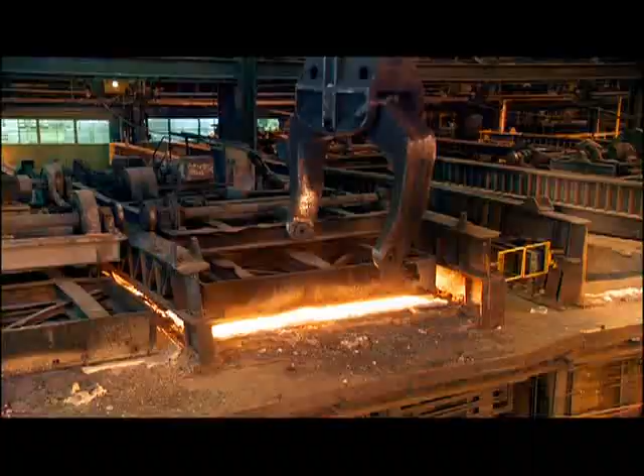It truly is a miracle metal. Steel, the most versatile, flexible, toughest stuff out there. And it's everywhere. In our buildings, our weapons, our roads, cars, and art. Even in our bodies. 90% of all metal made on this planet is steel.

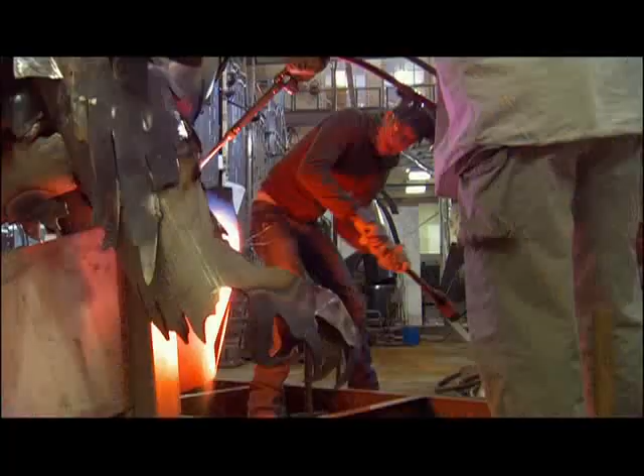Want to impress friends with your razor-sharp wit? You don't need a PhD, because I already got one. Sink into the steel springs of your chair, because I'm about to rivet you to your seat and make you a steel genius. Hi, I'm Daniel Wilson, and I want to know everything. With a PhD in robotics, I tend to see the world a little differently. So I'm going everywhere, finding the hidden side of everyday things, revealing it all in The Works.

Man's quest for the perfect shave has lasted 30,000 years. Flint, copper, iron, and bronze. Then, in the mid-1800s, the ultimate beard buster slices them all to ribbons. It's a razor made of steel. That's a sharp-looking blade. Steel. It originated in East Africa. It's the core of advanced human civilization. You know, steel's really only iron, with just the right amount of carbon. It's like alchemy, really.

The magic elements, iron and carbon. They strike a perfect balance between strength and flexibility. The story of steel is a mind-blowing journey through space and time. A trial by fire to the extremes of 3,000 degrees Fahrenheit. For more than a century, steel's been lifting us skyward. From the first 138-foot skyscraper built in 1885 to this 1,700-foot monster. But it's not just buildings. We live in a world of steel.

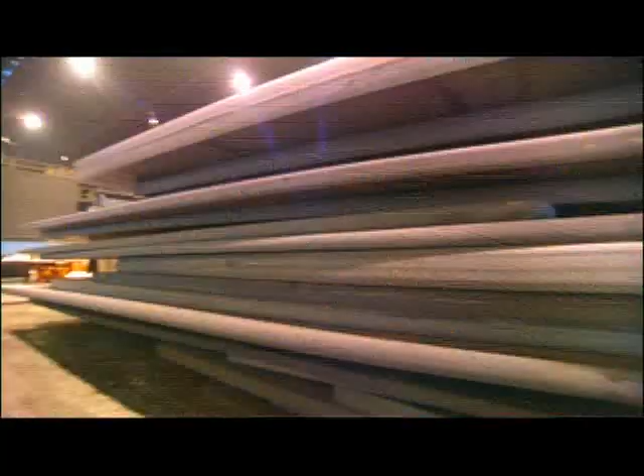Mankind produces 1.3 billion tons of it a year. That's 500 pounds for every person on the planet. Together, China, Japan, the United States, and Russia make 50% of the world's supply. Asia uses the most steel, whereas Africa uses the least. Pretty surprising, since Africa was where steel was first discovered. 3,000 years ago, they had the monopoly at a time when steel was more precious than gold. It gave its owner an edge, literally. Archaeologists tell us that the first steel tools were weapons, honed to a killing point. And even today, steel is still the material of choice for master forgers.

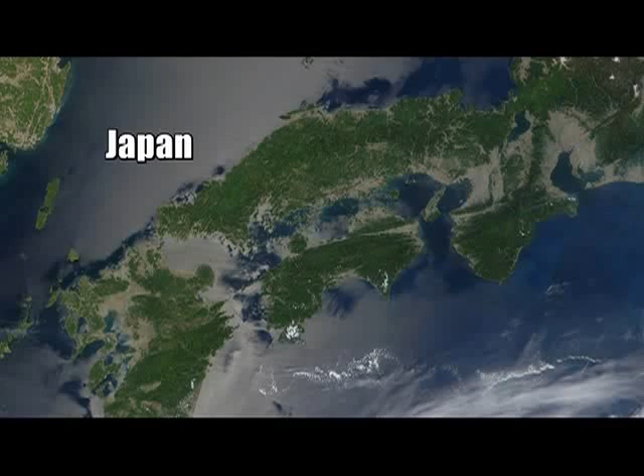I'm still thinking blades, and there's nothing sharper than a samurai sword. The secret to steel's miraculous combination of iron and carbon was perfected in 10th century Japan by samurai sword makers. But now it's nearly a lost art. I'm calling on one of a few masters left, hoping he will reveal the secret. We're on our way to meet the most unlikely samurai sword maker you can imagine.

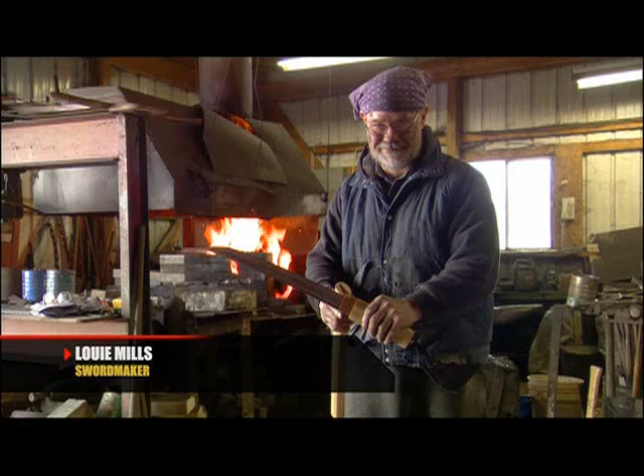Pleased to meet you. Come on, let me show you my shop here. Okay. Louie Mills has been making swords for over 30 years. His handcrafted weapons sell for thousands of dollars a piece. The process of making a samurai sword takes months of painstaking, back-breaking work. Today, though, Louie is going to let me try my hand at some basic sword making.

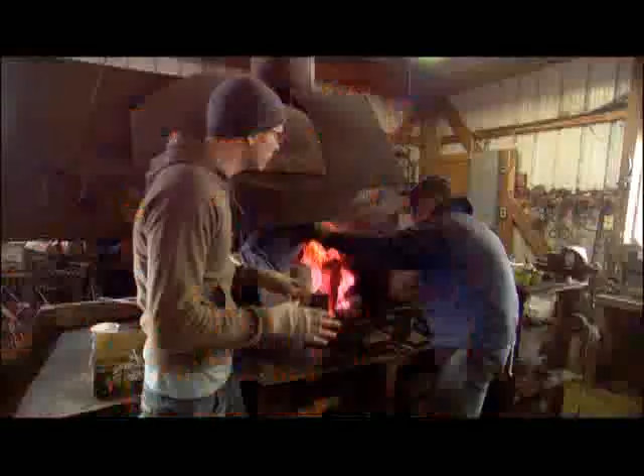So this is the first thing you do when you make a samurai sword? I have to make the steel. Got to make the steel. So what do we just pour in there? We poured in pure iron. It's 99.9% pure iron. But it looks exactly and feels exactly like kitty litter. I don't think the cats would enjoy it. Time for Steel Making 101.

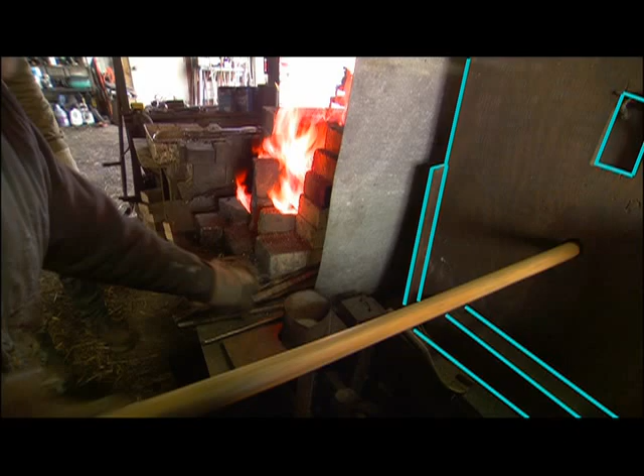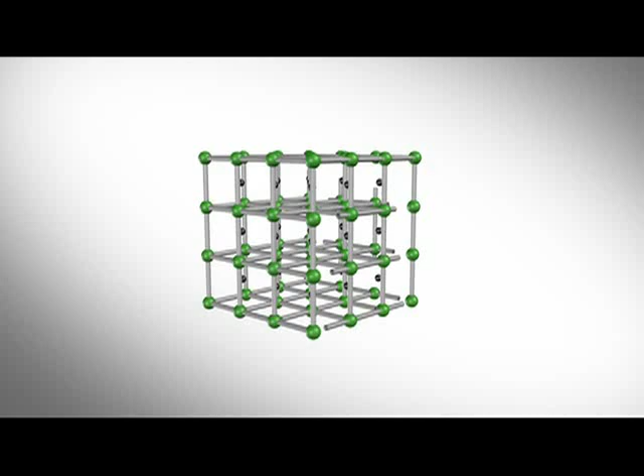The big breakthrough that led to steel was the discovery that blowing air into an open hearth, charcoal-fired furnace can generate heat sufficient to melt iron ore. Above 2,700 degrees Fahrenheit, the bonds between iron molecules break, allowing the iron to shed any impurities and bond with carbon atoms. As the hot liquid cools, the carbon and iron realign to form a lattice, a much stronger molecular structure. The carbon content of most steel is a mere 1% or less. But carbon is also the main fuel that powers steel smelting furnaces.

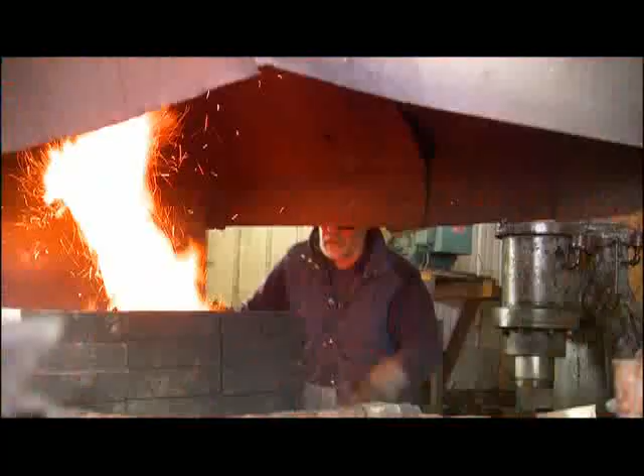So you need charcoal to make barbecue and samurai swords. Oh, that just exploded in my face. Forging steel pure enough for a samurai sword is problematic, even for a pro like Louis. In my work, I have about a 25% success rate. 1 out of every 4 blades that I make, if I'm lucky, will survive. Wow. This whole blade could be ruined right now? Oh, yes, very easily, within a second.

Creating a samurai sword is a painstaking ritual of purifying the steel. Heating, pounding, folding, then reheating. So this is the folding process that you always hear about with samurai swords? Yep. They say, oh, it was folded 100 times. Now, what does all the blade folding do for the blade? It refines the steel, distributing the carbon evenly through the whole blade.

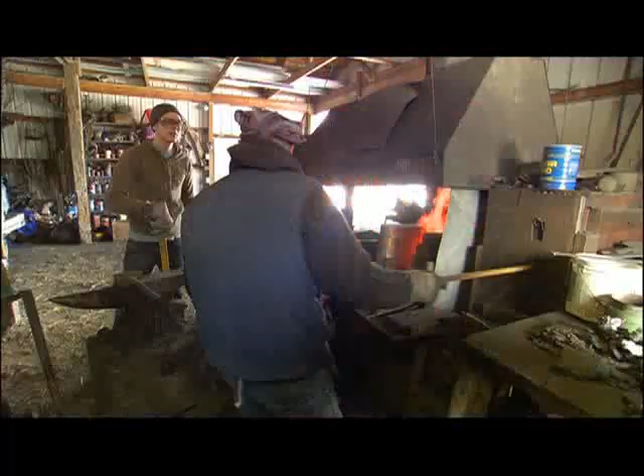Time for me to try my hand. Pounding a raw hunk of steel like this into a blade takes thousands and thousands of hammer blows. We won't bore you with all that. Luckily, Louis is ready with his Iron Chef move and miraculously pulls a finished one out of the oven. Now it looks like a sword. That is to say, it looks like you could stab it into somebody. Well, you don't want to do that.

Now the riskiest step. Heating the blade, then quenching it in cold water. If Louis's done everything right, the blade will curve, taking on the iconic form of the katana. But the tiniest impurity could destroy months of work. Louis's an old school guy. No gauges, no digital temperature readouts here.

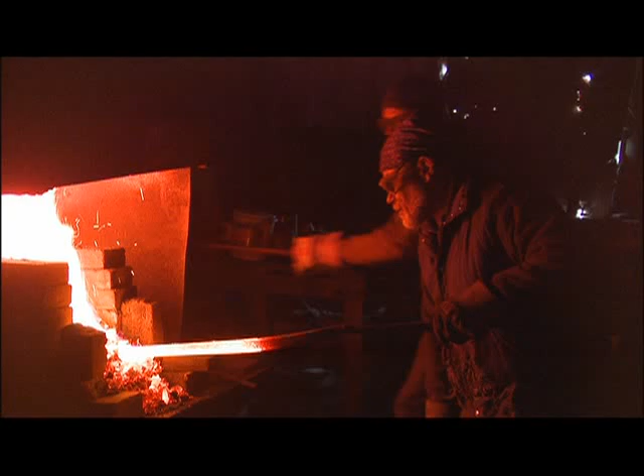We just got the lights turned off because the only way to determine how hot it is is by looking at it. He is not afraid of the fire. Yes, I am. I respect the fire. Yeah. Listen to the rhythm of what I'm doing here, okay? This sounds like a creature breathing. Yeah, it is. It is a creature breathing. Okay, coming out. Moment of truth.

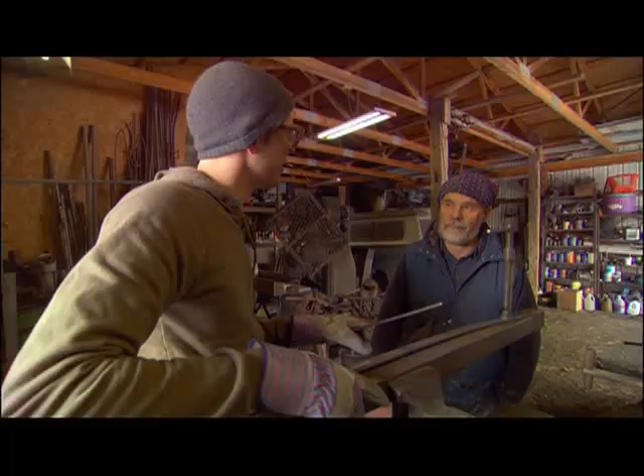This time, Louis's years of expertise pay off. The blade holds. The shape is perfect. That's what I wanted it to be. Well, we're good so far. So far, we're good. Hopefully. Yeah. Dodging hot slag, wearing gloves, putting on stylish eyewear, it's all well and good, but I want to see one of these babies in action. Hey, hey, hey.

It was said that a samurai's soul was in his sword. Hey! Hey! Considering it takes months of constant labor to deliver one of these babies, that makes a lot of sense. The status their steel swords gave the samurai in feudal Japan was so great, they were permitted to behead a commoner merely for offending them. Messy. Today we followed steel blades from their creation to their application, when those grass mats felt my wrath. My mighty, mighty wrath.

Samurai swords are powerful because they combine two different types of steel. On the outside, the super hard stuff that holds an edge. On the inside, a softer formulation that gives flexibility. The genius to steel is in this amazing diversity. And there are thousands of other types of steel with even more uses. We've already used 8 billion tons of it since 2000, and it's virtually indestructible.

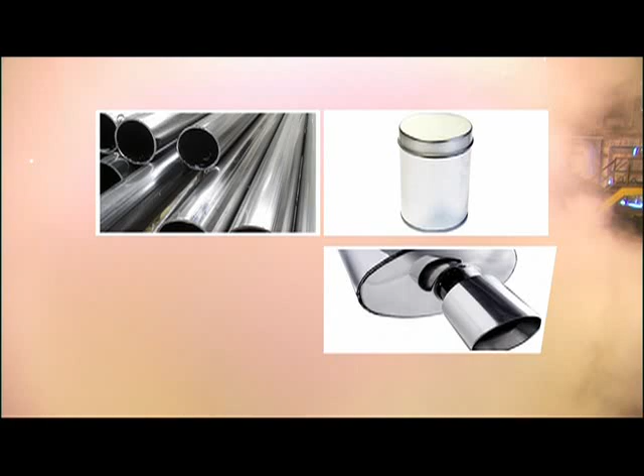Truth is, yesterday's slinky becomes today's super armor. They gotta shoot right now. Fire in the hole! So many different kinds of steel, over 3,500 in all. Carbon steel, stainless steel, chromium steel, electrical steel. Yet every type of steel is made from the same material, iron and carbon. Other elements are added to create different steel alloys, but the basic recipe is the same.

Carbon steel enables the cables on suspension bridges to sway in the breeze and hold up hundreds of times their own weight. Steel doors are fireproof and provide 10 times more protection against intruders than wooden doors. Canned goods need no preservatives. Steel does all the work. The chromium steel on your toaster enables you to keep it clean and see yourself. Your car's safety cage, the cutlery you eat with, power plants, power tools. You guessed it, steel.

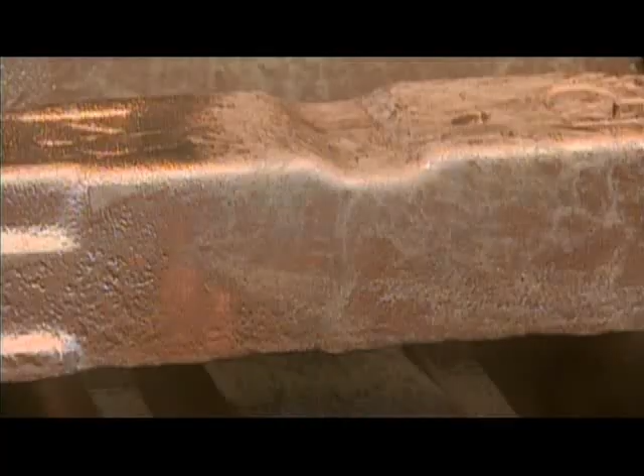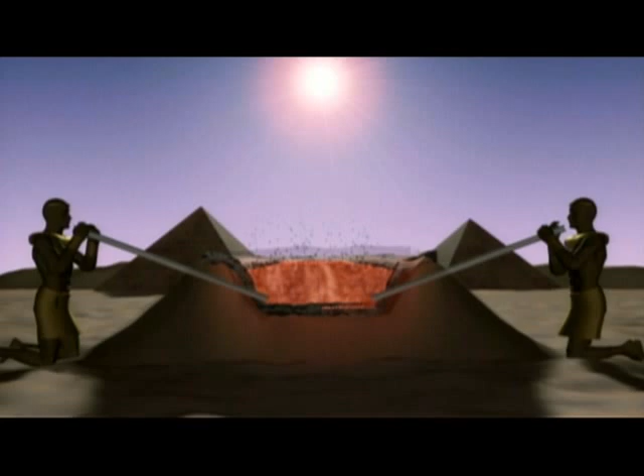Mankind was refining steel 3,000 years ago in China, India, and Egypt. They made steel from iron meteorites they called metal from the sky. Heating the iron ore to the 2,500 degrees needed to force the carbon out was difficult. Open fires only reach about 1,000 degrees. So they raised the temperature by blowing in oxygen from the side to fan the flames. In the Middle Ages, forgers discovered the bellows. They used it to pump air into the fire, raising its temperature. But steel was still rare and precious, reserved for swords and armor.

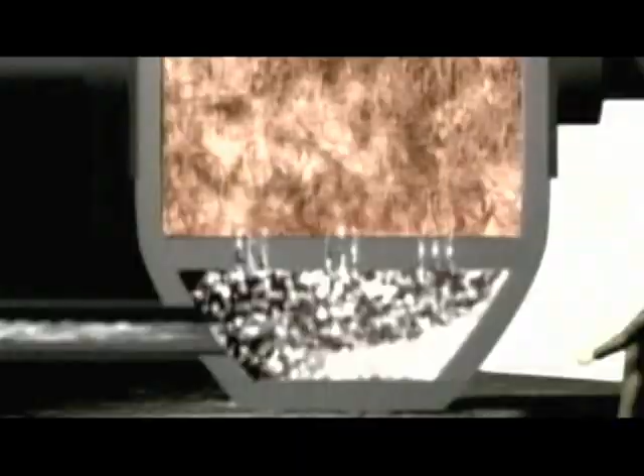But then a breakthrough. In the late 1850s, Henry Bessemer unlocks the great mystery of steel. He discovers that by blowing cold air into the bottom of the fire, it can heat the iron to over 3,000 degrees, enough to blow off the carbon, converting the iron to steel. This is a huge breakthrough for industrial production and especially for rail travel. Iron train tracks rust easily and are vulnerable to rapid changes in temperature. This makes them crack and buckle, causing frequent accidents. But steel tracks are more flexible and durable. This makes train travel safer. And mass production of steel makes factories possible and power easier to produce.

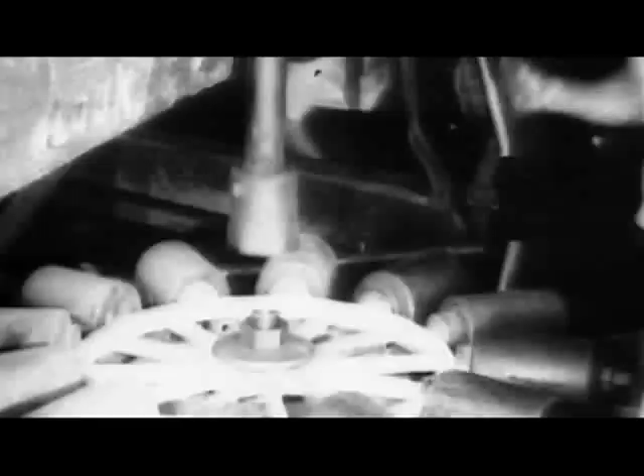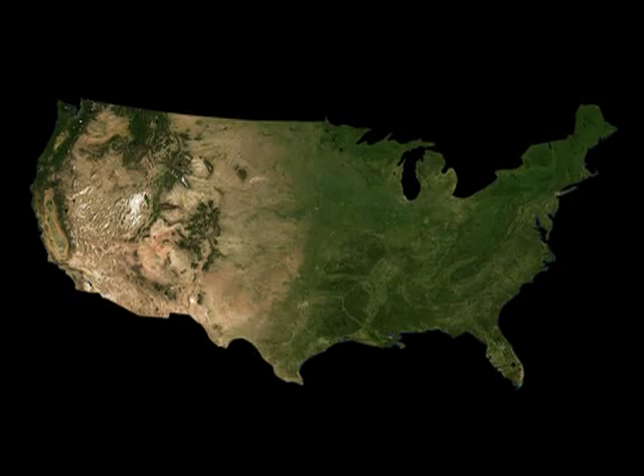But I still want to know where all that steel from all those trains and 19th century stuff went. Is it buried somewhere? Turns out, it's right here, all around us. I've come here to Coatesville, Pennsylvania to learn more. This scrapyard supplies used steel to ArcelorMittal, a steel company that operates in 60 countries, producing 10% of world output. Basically what we do is heat it, beat it, and treat it. Take steel, melt it, change it into different shapes, shape of plates, heat treat it to get the properties, and then sell it to our customers.

Scrap comes from old cars, trucks, bridges, buildings, appliances, anything that was made out of steel. Here's another secret to steel. It never dies. It can be recycled repeatedly without losing strength. Oh, check it out. Somebody threw away a perfectly good bike. Luckily, it's about to be recycled. It'll all be over soon, little buddy.

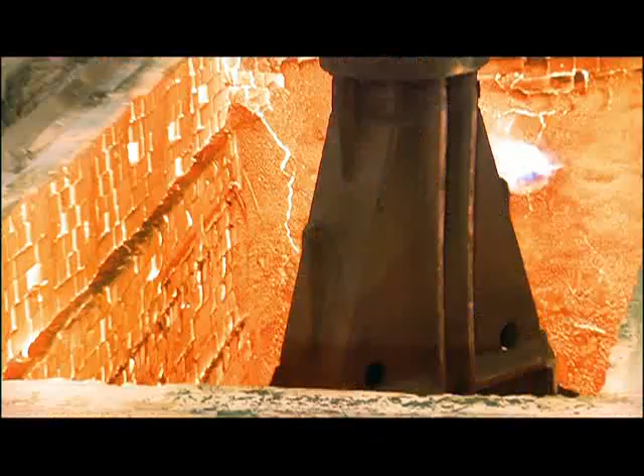Here's where the magic happens. The scrap is melted and reformed into these hot slabs. Here, they throw the whole frying pan right into the fire. Instead of using primarily coal or coke, ArcelorMittal uses electric arc furnaces. Less energy is needed, and less toxic byproducts like sulfur dioxide and hydrogen sulfide are released.

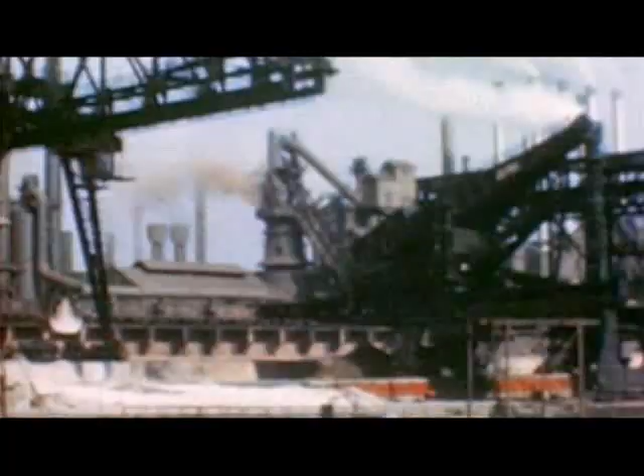Recycling steel is a big deal. For every ton of steel you recycle, you save 2,500 pounds of iron ore, 1,400 pounds of coal, and about 120 pounds of limestone. Why avoid the limestone? Because when it's used to burn the slag off molten iron, it releases toxins like sulfur and phosphorus. Fortunately, this step is bypassed here.

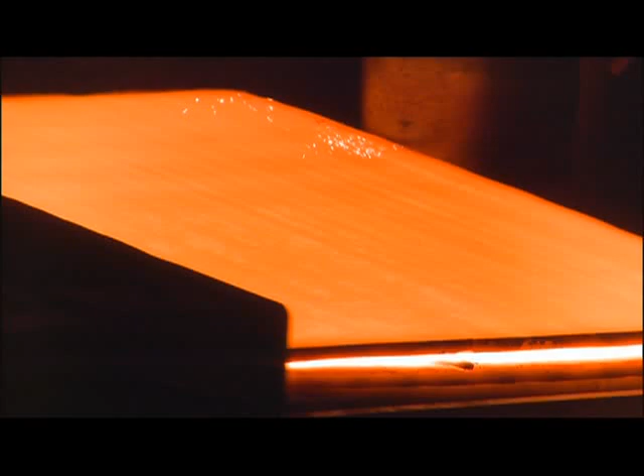So can you describe the overall process for me? This piece of steel is coming through the descale box. The high pressure water will clean the surface. Whoa! What's this prehistoric machine doing to that piece of red-hot steel? It's exerting up to 10 million pounds of pressure to make it thinner, longer, and wider. So those are just like gigantic rolling pins, and it's using steel as the dough. Yes.

Why are they coating it in water? The water knocks the oxide off of it, the scale that forms. Okay. And if we don't knock it off, it'll get pressed into the surface. Make it impure. Yeah. This is the most impressive car wash I've ever seen in my life.

Guess which material is recycled more than aluminum, glass, paper, and plastic combined? Yeah, it's steel. You're watching a show about steel, so it stands to reason that that would be the answer.

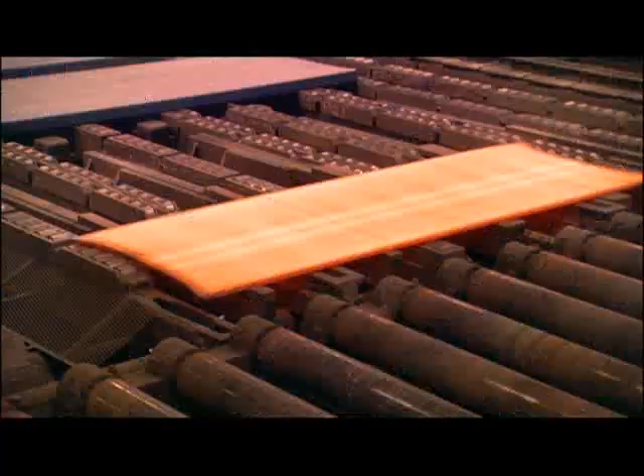So, whatever happened to that bike I saw out in the scrapyard? It's been transformed into these super tough, high hardness steel plates. Those plates are used for the armored program, especially the Humvee vehicles and the new MRAP, to provide ballistic protection for those vehicles. But what makes the recycled steel that comes out of this process different than what went in? He tells me that when the scrap is melted down, chromium and nickel are added to it.

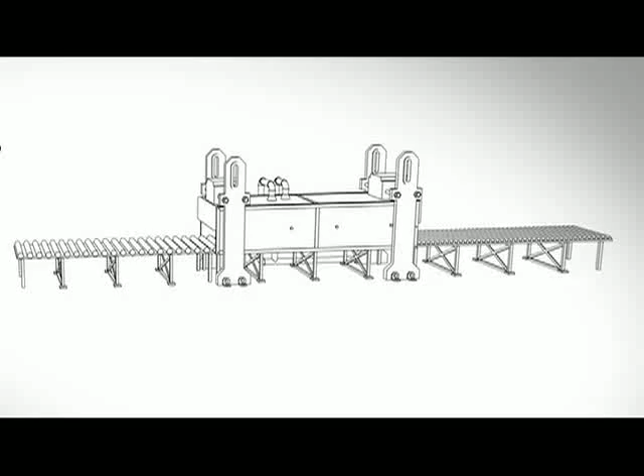Next, they roll the recycled steel into sheets, pressure and heat treat it, and cut it into plates. The infusion of chromium and nickel, plus the extra pressure and heat treatment, creates a completely different alloy. A super steel that's more rigid and shock resistant. Perfect for armor plating. To find out how strong it really is, I've come to Alpine Armoring here in Dallas, Texas.

Whoa, look at the size of this monster. Hey, you think I could drive? Sure. I'll take shotgun. All right.

Attention! Fun fact to know and tell. The term to sit shotgun comes from the armored cars of the Wild West, when a guard would ride on top of a stagecoach, armed with a shotgun. End of transmission.

This is a smooth ride. How fast does this thing go? Get it up to 80 miles, 90 miles an hour. So what's this truck that we're in? This is a SWAT truck, built for the law enforcement police community in case they need to go after some cases that require attention. Yeah. How many tons of steel are in this vehicle? Well, believe it or not, you're driving a 12-ton truck. I know it doesn't feel like it, but there's a lot of steel there.

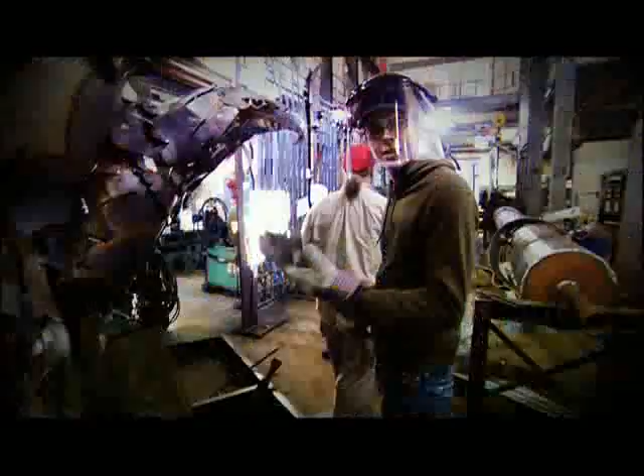Now I'm gonna put my life on the line to see if steel can stop bullets. So apparently Fred was serious about us getting shot at while we're in this armored vehicle. Fire in the hole! They're gonna shoot now. They're going to shoot right now. My survival depends on how much kinetic energy this steel armor can absorb. Should I be nervous?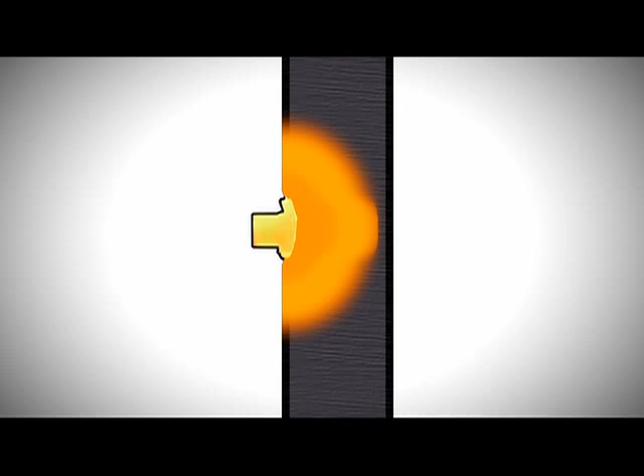Let's rewind for a second. The bullet travels at 3,200 feet per second. That's almost 2,200 miles an hour. All that energy will be instantly released on impact. The bullet mushrooms, deforming as its energy transforms to heat. Why does that happen? Well, as you recall from Louis' Samurai Workshop and the recycling plant, heat softens steel and causes it to expand. The steel absorbs all of the bullet's kinetic energy.

I'm still here. There it was. Surprised? That wasn't as bad as I thought it would be. I, for instance, wasn't shot, as far as I can tell. We know the steel in this truck is tough, but it's not perfect. It's still vulnerable to explosive-tipped bullets or rocket-propelled grenades.

These weapons release more heat on impact. It's called the pyrophoric effect. When the projectile hits the tank's armor, they both partially liquefy, which can penetrate the steel. Being hard has limitations, but what about steel's other defining characteristic? Its pliability. Lowering the carbon content of the steel makes it more pliable. Stainless steel cutlery only has 0.5% carbon. That's why you can bend a fork.

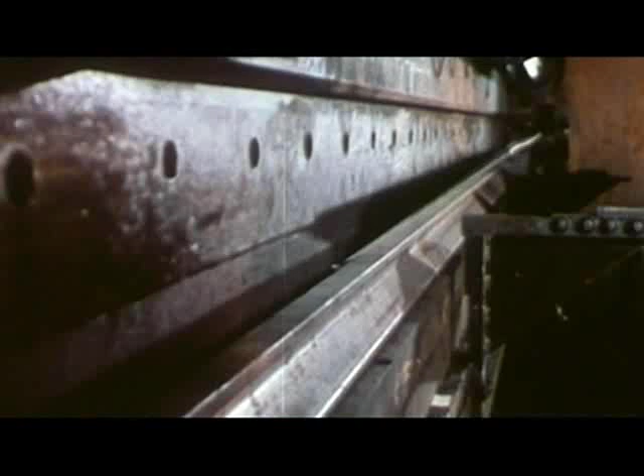But what if you wanted to build a 140-foot steel monument to humankind's aspirations? What material would you use? That was the problem facing the 1964 World's Fair planners. What stronger, more durable, and more appropriate metal could be thought of than stainless steel? Thousands of pieces of stainless steel had to be bent to precise specifications so every piece could be welded together to form a perfect sphere.

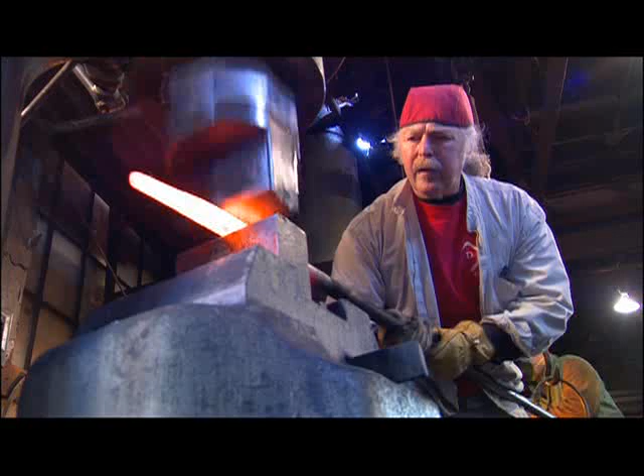Despite its 450-ton mass, the Unisphere appears to float weightlessly and still looks as new as the day it was completed in 1964. It's not steel, it's art. But who's pushing the outer boundaries of steel's plasticity today? To find out, I've come to Rochester, New York. Sculptor Albert Paley has spent 30 years perfecting his steelworking skills.

Steel has incredible versatility. So what is steel capable of and what can it do? Obviously, we know it's a very strong structural material. A lot of people think of steel as hard, rigid industrial material, but when you heat it up, it takes it back to its original state, which becomes very plastic and very fluid. Yeah. And we try to accentuate that fluidity with the sculptures.

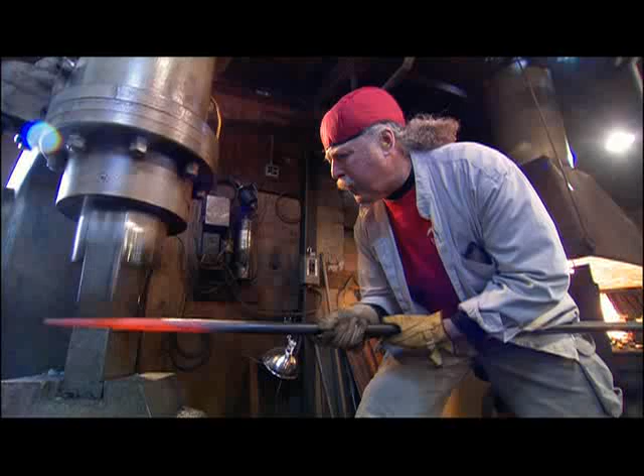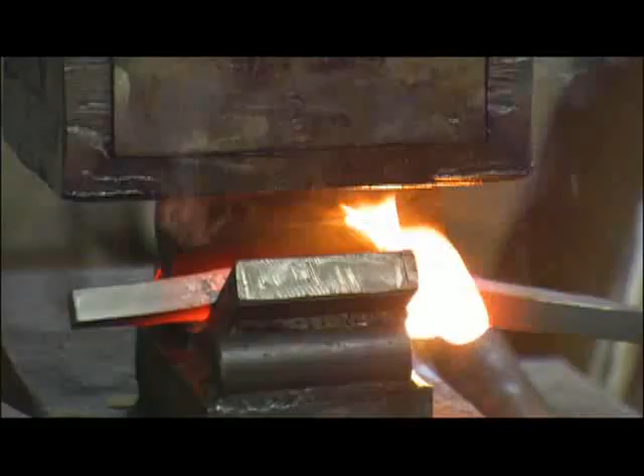How does Albert do it? He starts with low carbon, or mild A36 steel, a structural steel commonly used in I-beams because it's strong but flexible. Albert's crew uses oxyacetylene torches for the welding. These are acetylene-fueled heating and cutting tools that use oxygen. Get it? Oxy. To generate 2 million BTUs of heat.

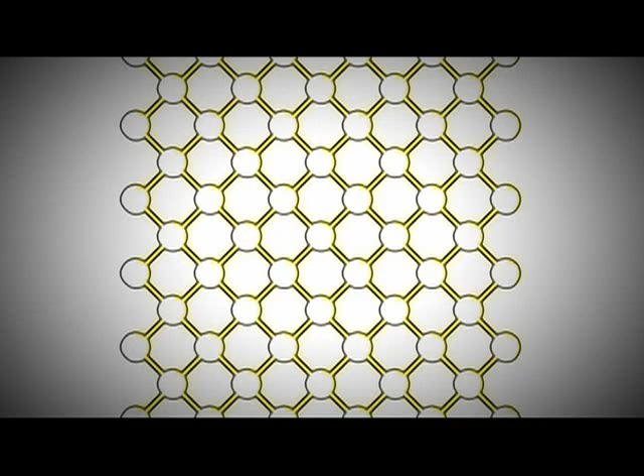As it gets hot, the iron expands and the molecules expand, so it becomes much more flexible. Right. You can overheat it and actually burn the structure of the metal. And when you burn the structure of the metal, it loses all cohesiveness and it just falls apart. So we have to keep it in a good range.

Okay, so on this gate, this is what it's supposed to look like at the end. This is what we've got, this big tweezer. How the hell are we gonna go from this to this? All right, each one of these bends that you see will be an individual heat. Okay. So we'll take a bend and we'll just keep on working this and weave it through. I understand that theoretically. I'm still gonna have to see it to believe it, though. No, more than seeing it, you're gonna be doing it. So I'm gonna have to do it to believe it.

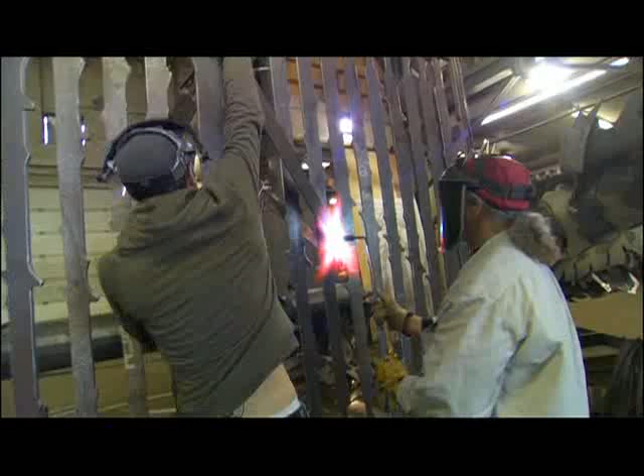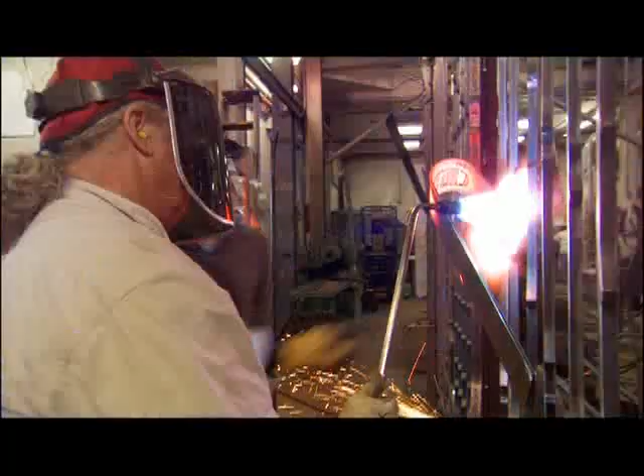This gate has 180 pieces of steel, all of which need to be cut to precise specifications, shaped, and welded together. When completed, the gate will weigh 10,500 pounds. Unbelievable! Albert tells me that a project like this usually takes at least a year to complete, with up to 100 people working on it.

But what does it all mean? Turns out, everything we've learned about steel behind the scenes is exactly what Albert's trying to hide. You know, the steel is quite heavy, quite massive. What I try to do with the designs is to kind of belie that sensibility. So when you see this, it appears very light and very fluid, as if gravity is not dealing with this. And what could be lighter than a bird in flight? Albert's latest project, a giant 5,500-pound steel eagle. This looks like a cartoon drawing of a tool. But no, I can assure you it's real.

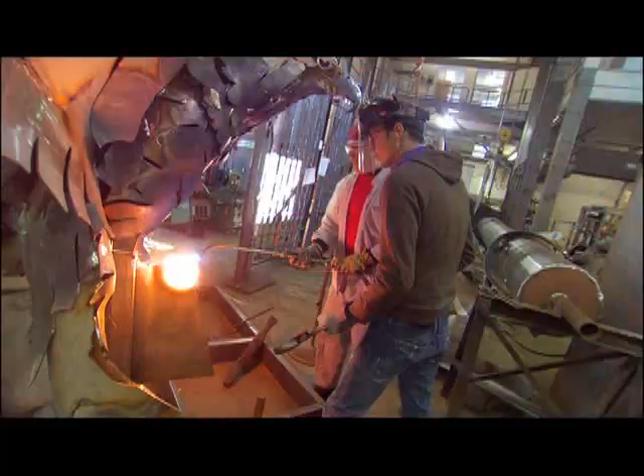Making art. My knuckles are burning up. You are completely nonchalant about this process because you've been doing it for 30 years. I'm pretty sure I almost died. I am slowly catching on fire.

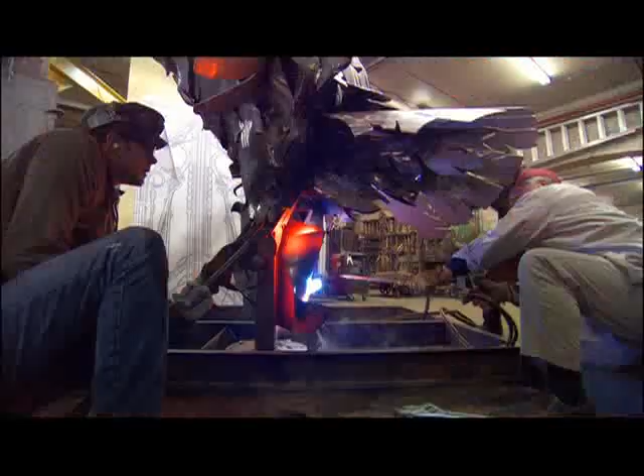You want to pull that over so I touch it. Yeah, there's not really any communicating down there. So you... well, you did it. How did you communicate? I don't know. Every command you gave me was the same. Ah! Like that. And then sometimes you'd wave your hands at me. Yeah, where you got the idea? I'm either doing really good or really bad.

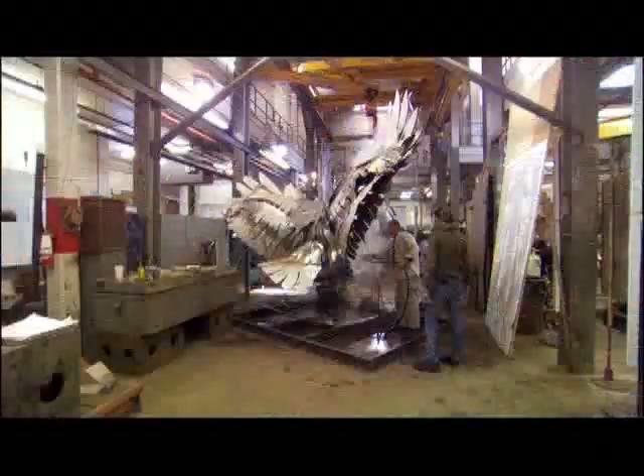I never thought that art would take such a physical toll, you know? It's amazing, actually. I'm out of breath from making art. There's no better way to be. The genius of steel has a dark side, too. You've got a whole torture chamber for metal out there.

Steel's amazing. It's able to lift tall buildings from the ground, stop a speeding bullet, even leave our planet behind. It really is a super metal. But even steel has its kryptonite, its fatal flaws. Sometimes steel fails. And when it does, lives are at stake.

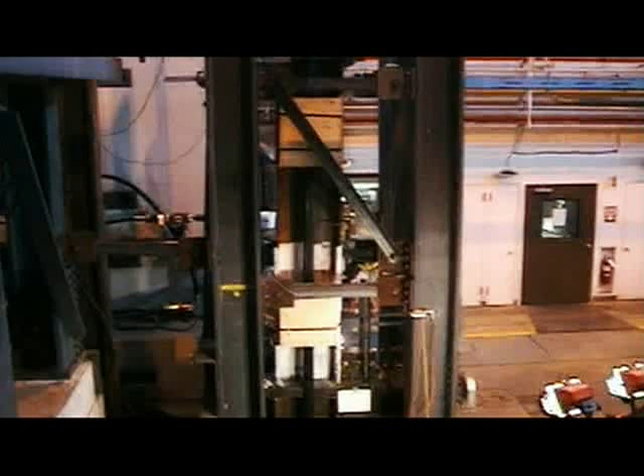Researchers at the ATLSS Center are working to make sure this doesn't happen again. This place is like CSI, but the forensic investigations taking place here are for steel. What do you do here? Well, this is an example of the kind of thing we do here. This is part of a structure that was originally 4 stories tall. Here's one of the columns, and imagine 2 more. Okay.

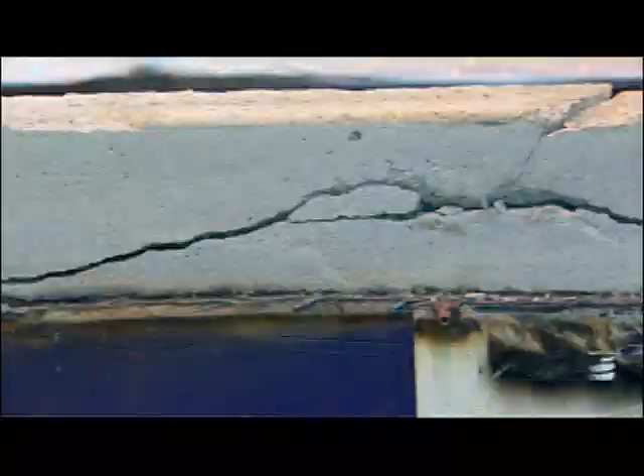We subjected this structure to simulated earthquake loading, and you can see the results. Although there's quite a bit of deformation here, the structure still remained safe and standing. Every machine in this massive lab is built to do one thing: test steel. Richard, what is this big creaking monstrosity?

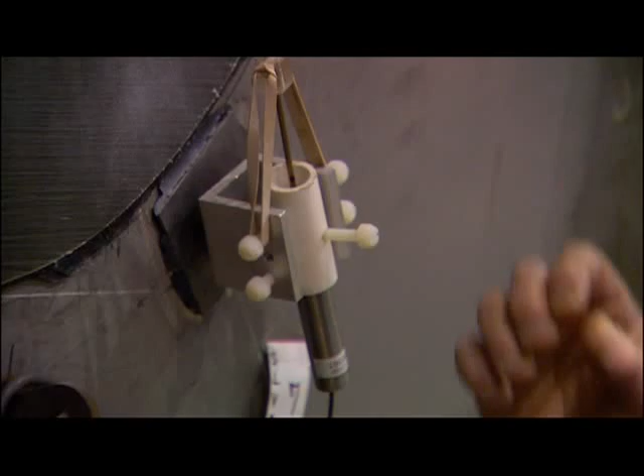Well, this is a box kind of structure that's composed of some steel framing with some fiber composite panels in it. And you're looking at some of the instrumentation we're using to measure the deformation in the panels. So as this panel stretches out, this little guy, you can just see it's moving just a little bit. Just ever so slightly. And it's sending that data through this cord and off to a computer.

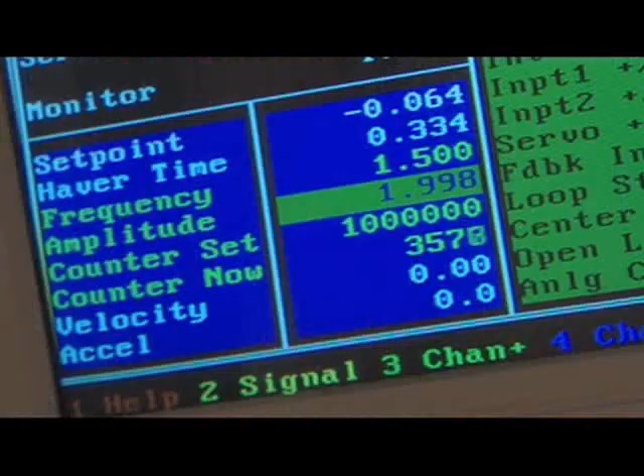Should I be worried about these really ominous noises that are coming from this thing? Yeah. In fact, I'm surprised, actually, when you look at that, you can see quite a bit of motion. Basically, Richard tests new kinds of steel by applying extreme pressure to it, stressing it day after day. That's the thing about science. It's so time-consuming. How long are you gonna let this go? Well, the test we're currently running takes about a week. In that time, we apply about 1,000,000 cycles. Each cycle stresses the steel by applying pressure to specific target points.

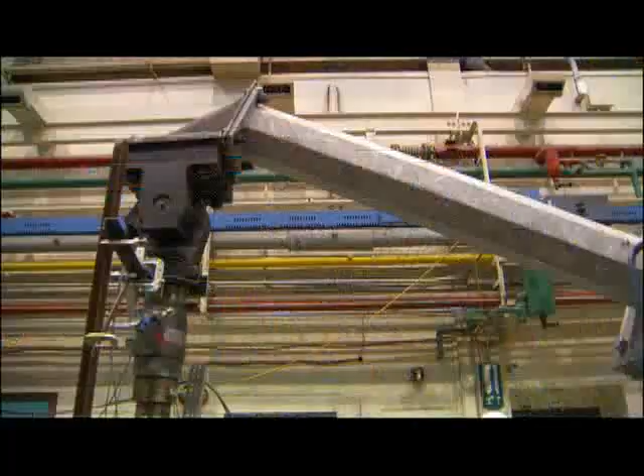We depend on the strength of steel every day, but rarely are we aware of its limitations. Potential disasters lurk under our feet and hang above our heads all the time. Even steel has a breaking point, and it's Richard's job to find it. This looks like a light pole. Am I wrong? It is a light pole. In fact, this is a type of structure that we would use to hang a signal out over an intersection.

What would happen is when the wind blows, it'll make the mast arm vibrate up and down. As it vibrates up and down, it induces stress in this connection and in this connection here. Now, do you put sensors on this thing, or do you just wiggle it back and forth until you find cracks? Well, you see we have some strain gauges here, and we're using that to determine the stress in the pole, and we can actually see some cracks. Where the mast arm is meeting this base plate on the top. Right. There's quite a substantial crack that's certainly visible and worth looking at. Yeah, that is really obvious.

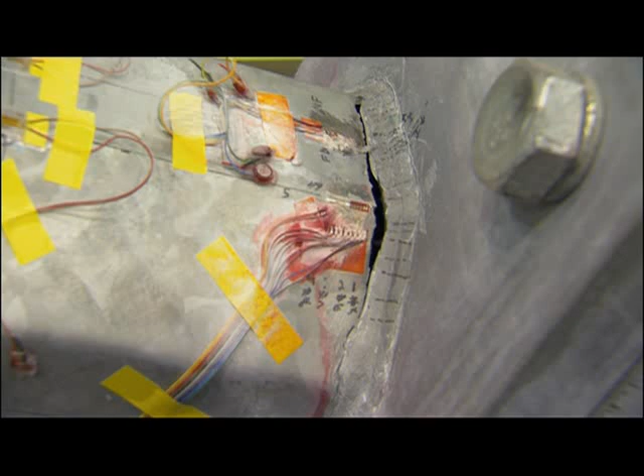What's with all the red paint? Well, that's part of our process for being able to identify the crack, especially when it's very small. It starts as a small crack and gradually grows. We use that as a penetrant to help mark the crack or make the crack more visually observable. Wow. Repeated stress, such as wind or vibration or load, can cause metal fatigue. That's right. The steel itself gets tired over time.

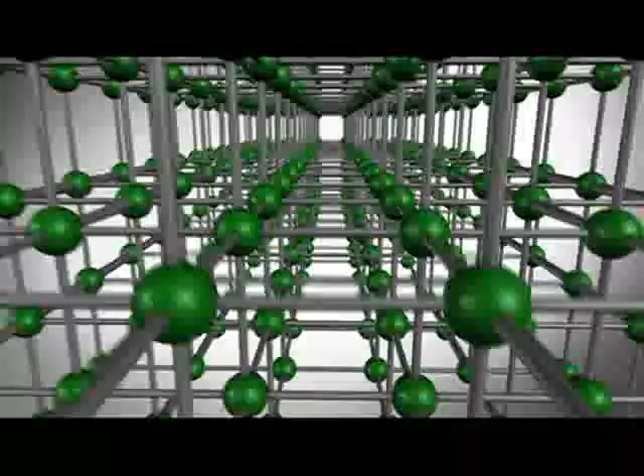A microfissure forms at an atomic level, dislodging a few molecules to form a tiny crack. If left unchecked, the splinter widens. Then, all it takes is a catalyst for the steel to reach its breaking point. Earthquakes, floods, hurricanes, terrorist attacks. These events create conditions that push steel to the limit and beyond.

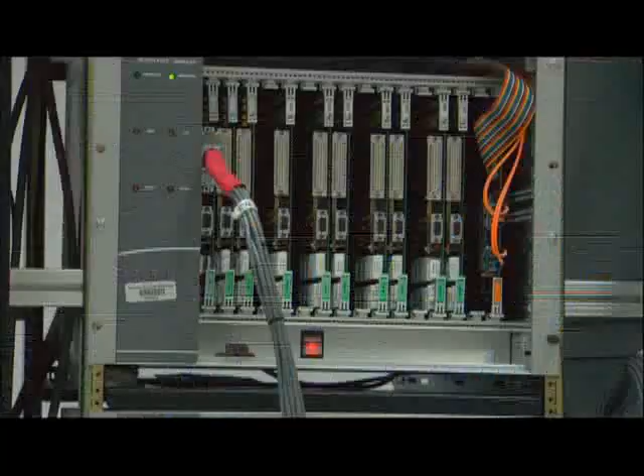You've got a whole torture chamber for metal out there. You're recording every little thing that happens to it, and it all goes to these computers. What are you doing with all that data? We analyze it, study it, take it apart, look at it in detail, try to figure out how to make the structures perform a little bit better. So you torture the metal, collect the data, analyze it, and then make the metal better, and you make the world a safer place. Exactly. Tough love for the steel.

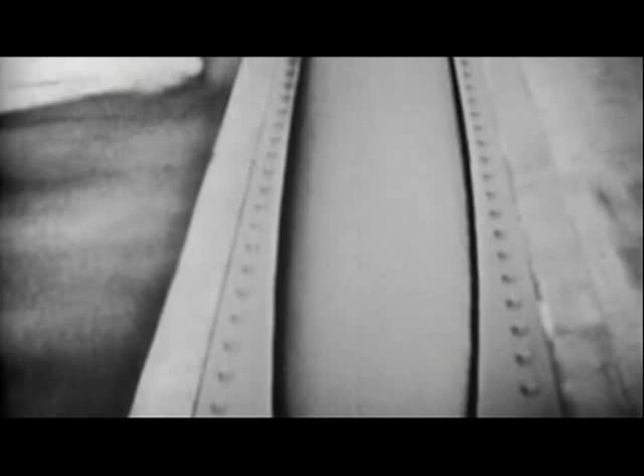1940, the Tacoma Narrows Steel Suspension Bridge. You've seen the footage, right? What happened? The force of the wind didn't destroy the bridge. Instead, the pulse of the wind was responsible. It turns out the shape of the canyon caused the wind to blow in gusts. The frequency of the gusts coincidentally matched the frequency of the bridge. The waves amplified the bridge's vibration to the breaking point, pitching and rolling, finally shaking itself apart.

This phenomenon is called sympathetic vibration. Now for the good news. Sympathetic vibration actually makes steel ideal for creating music. Makes a lot of sense. I want to know more, so I'm on my way to Dallas, Texas to meet a master of metal.

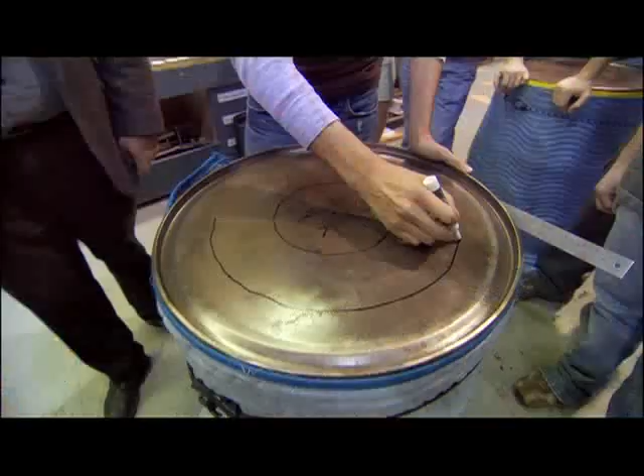Professor Joe Perea not only makes steel drums, he uses them as acoustic laboratories for his students. This is just a regular steel drum? That's right, just a regular container barrel, just an ordinary 55-gallon oil barrel. What does one of these cost? It depends. If you buy brand new, you can get them for $15 to $30. If you use used oil barrels, sometimes you can get them for free. Steel drums were invented in 1940s Trinidad when people started recycling discarded oil barrels.

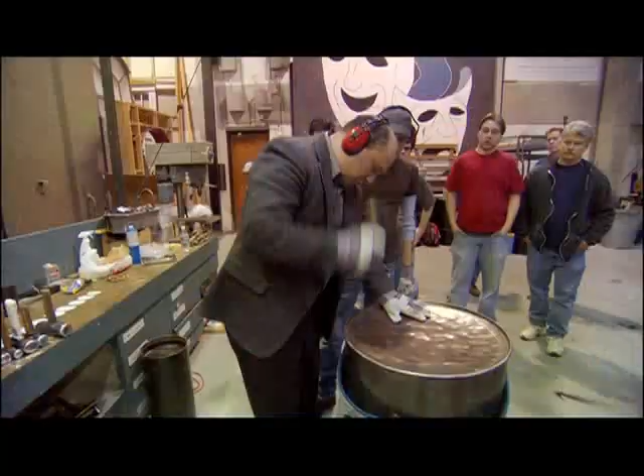All right, let's get to the good part. Time to get hammered. Earplugs, ear protection, please. What gives steel drums their unique, mellow, echoey sound? You guessed it, sympathetic vibration. Just like the old tuning fork experiment. Two identical tuning forks, one on a wooden box. I strike the other one, place it on the box, mute it, the unstruck tuning fork sings. It's not magic, it's vibrations moving through the air.

How does this work in the steel drum? The instrument literally sings to itself, creating a ball of vibrations that travels outward from the point struck. So how do you figure out which note you're going to get just based on the dimension of the piece of steel? A set of measurements will tell me this particular note needs to be 5.5 inches along the outer rim, and then it needs to be radially into the drum approximately 6 3/4 inches. So based on the dimensions of these little surfaces, you get different notes. Absolutely. So the finished product, as we come over here to this drum, you'll see where we have our bank of rim notes and then our inner octave of notes.

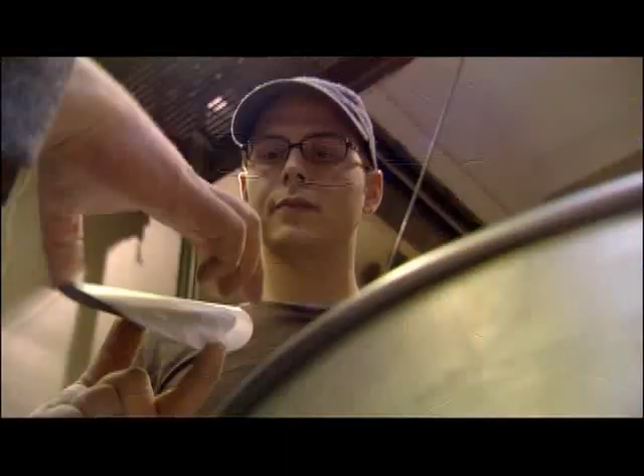So what features of the steel affect the final sound? If you think of a flat spring that you would see as the suspension system on the back of your car, it would be something like this. When you applied load on it, it would flex and come back up. In this case, it's a little bit different. You're going to have a little bit of curvature on the short axis, and a little bit of curvature along the long axis as well. All these tension points that we're creating here are going to create this sort of elasticity that's going to hold the note in check. You're building different springs into the surface. That's exactly what's happening. Wow.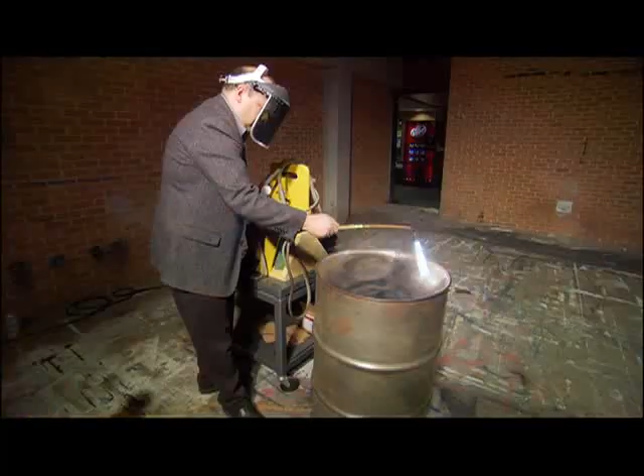Steel drum heads can hold up to 30 different pitches, and that means 30 springs. That's a lot of tension for a sliver of steel less than 1 millimeter thick. To make the drum head stronger and more resilient, Joe heat treats it with an acetylene torch. Get cooking. Without this heat treatment, the steel in the drum head would be so unpredictable, the drum wouldn't hold its pitch. Little sizzle here.

After he finishes quenching the red-hot drum head, Joe invites me to take one of his homemade drums for a ride. Your turn. Okay. Visualize, Daniel. Sandy beaches, drinks with little pink umbrellas, the rhythm of the islands pulsing through your veins. Someone put too many notes in here. Needless to say, Joe demotes me to something a little more my speed.

The acoustic properties of steel can make beautiful music and, as we've seen, horrible destruction. Steel has some miraculous qualities. Ow! That is a serious problem. Sometimes it can be a real savior. My journey is almost complete. We know steel's combination of strength and flexibility supports the world around us, but the final frontier might be the most surprising. Inside us.

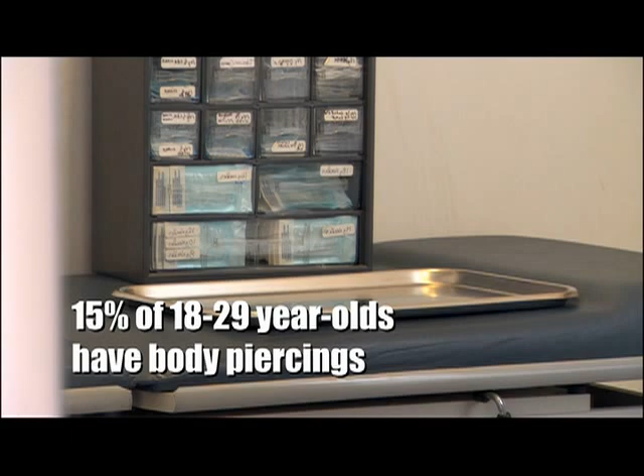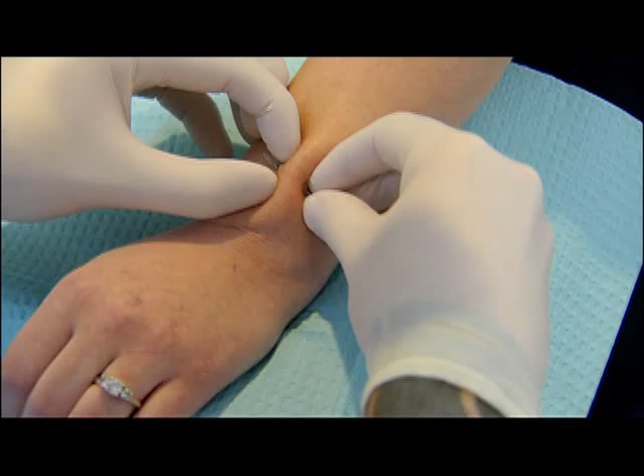I'm always aware of the steel that's in my body. I can either taste it or I can hear it clanging around. It's just something that's always with me. It's a sensation for sure. I like it. She's not alone. Today, more people than ever are getting body piercings, a process dating back thousands of years. It wasn't always a safe proposition, but there's a final property of steel that makes it a miraculous metal. It's sterile. There's no piece that heals better and more efficiently than surgical steel.

Surgical steel is a type of stainless steel, which was invented by metallurgist Harry Brearley in 1913. He discovered that adding nickel and chromium to steel created a metal that won't rust. He called it stainless steel. Perfect for cutlery and instruments. These days, piercing enthusiasts are limited only by their imaginations and the disapproval of their mothers.

For all piercings, you're going to use steel because it's non-porous, they won't collect bacteria. Because it's strong, it's not going to corrode. I don't take out my body jewelry, I leave it in, so it pretty much just becomes a part of me.

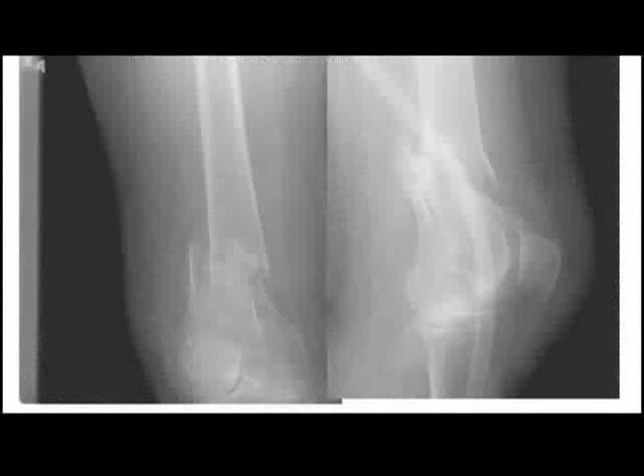Steel forms the skeleton of our cities, holding up buildings and bridges, reinforcing roads and overpasses, and bringing us electric power. But it's also the metal of choice to repair the human skeleton. Orthopedic surgeon Dr. Kenneth Rodriguez explains to me why our bodies don't reject steel. Stainless steel is a very biocompatible metal.

It is the chromium component of stainless steel that creates a layer of chromium oxide over the implant by a process called passivation. This layer minimizes corrosion and corrosion byproducts. So it doesn't rust? Correct. Myth or fact? Stainless steel cannot corrode. Free iron molecules on the surface of stainless steel can lead to corrosion inside because iron reacts with water to form rust. So how can we put it in our bodies?

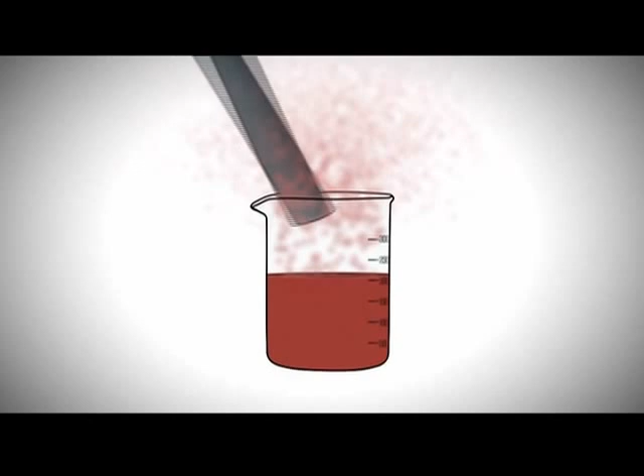Dipping stainless steel in nitric acid removes impurities, forming an invisible film of chromium oxide on the surface, preventing contamination and corrosion. The steel is made passive. And for reasons scientists are still not sure of, this coating has the spontaneous ability to repair itself.

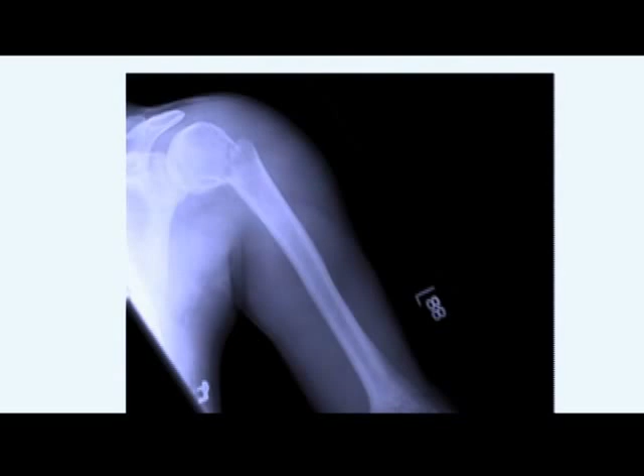So Daniel, this is a typical example of the kind of fracture we would treat with a plate. We're using this stainless steel plate that has screws going into the head. You can see them right there. Try to grab as much of that bone as possible. Let me show you something, Daniel. This is a standard set of surgical orthopedic plates.

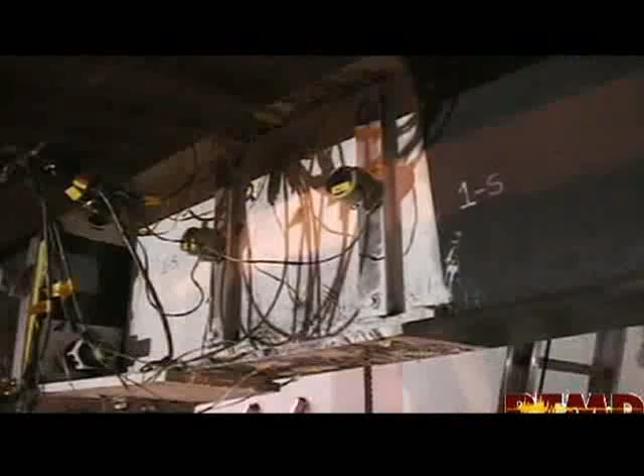So when is steel the best material to use? Steel is usually used when you want to fix a fracture with some degree of rigidity. Stainless steel has the highest rigidity of most metals used in implants. Remember how Richard at Atlas explained metal fatigue? It can happen inside your body, too.

Ow! What happened here? This is a failure of a plate. The metal can actually fatigue while it's inside you? Like any other piece of machinery. But you would think it would last for as long as a sheet of armor or something. It's quite remarkable. It can last for about 6 or 7 months before it breaks, but it will eventually break. Wow.

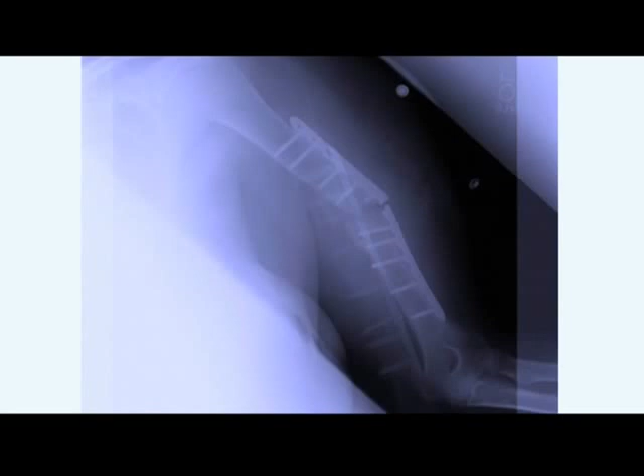Just think about it. You can take any significantly large piece of metal and gradually bend it 1,000,000 times, and the day will come when it will snap like a twig. So it's a race between the steel plate and the bone. If the bone doesn't heal fast enough, then the plate will eventually break from metal fatigue? Absolutely. Even steel is bound by the laws of physics. But its failures are far outweighed by its versatility. Steel is truly man's best friend.

Okay, we've tested your metal, but you're not a steel genius yet. Pop quiz. What was steel first used for? A cutting tool. 3,500 years ago, man invented the first steel blades. So our journey takes us full circle. Back to the blade, to the Lamson and Goodenow knife factory, where the timeless properties of steel meet the cutting-edge technology of robots? This is our Burger robot grinding cell.

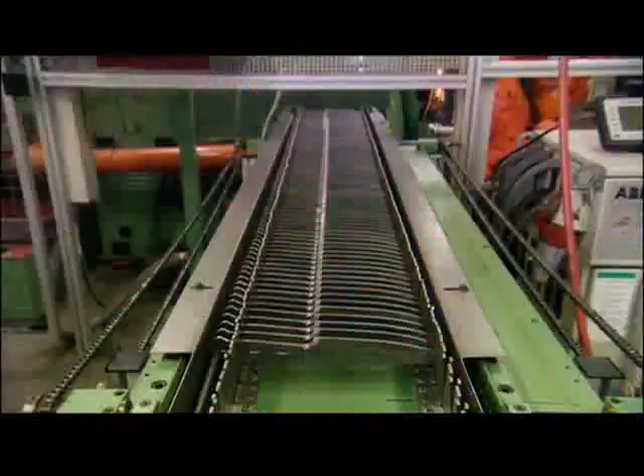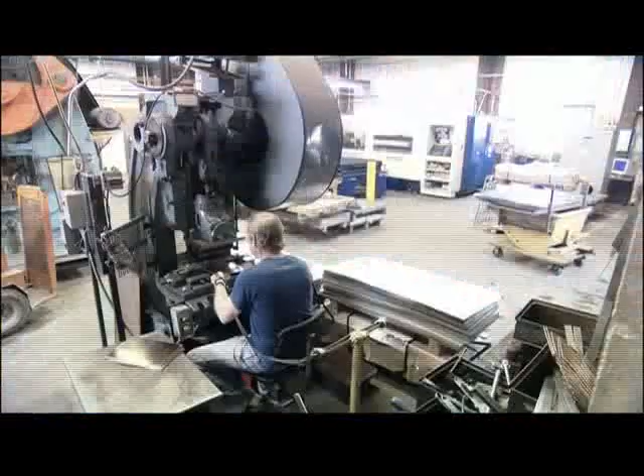The robot we've had for 3 years, and what had taken 3 men 10 minutes to grind a knife now takes our robot 30 seconds. Here, future meets past. The genius of steel lies in its constant reinvention. Our high production laser has replaced a century-old stamping process. We can now cut thousands of pieces an hour versus what had taken many hours of manual labor and dangerous labor.

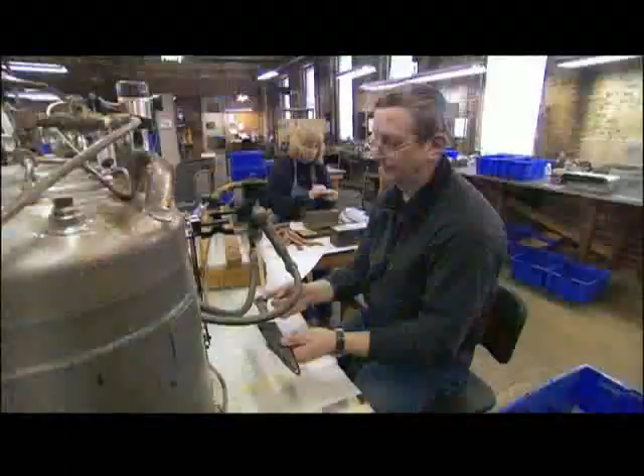But even with all the high tech, the best knives still require the human touch. So every knife that we make, from the grinding process on, is hand finished. The knives are tapped in by hand. We move it into the handle finishing process, really giving them that beautiful hand feel and hand finish.

There's something I've been dying to know. Can you shave with a Lamson sharp knife? You could definitely shave with it. I wouldn't recommend it, but yeah, you probably could shave with a Lamson knife. Men first shaved with flint, copper, bronze, iron, and now steel. For 3,500 years, men have been obsessed with this miracle metal.

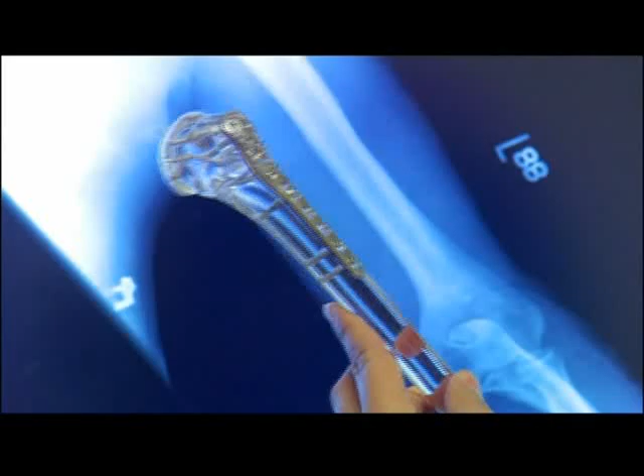Strong, sharp, durable, infinitely malleable, flexible, hard. Steel is whatever we need it to be. That is the genius of steel. From swords to scalpels, skyscrapers to the slinky, steel supports us, surrounds us, even inspires and amuses us. Now that you know all this, you are a steel genius.